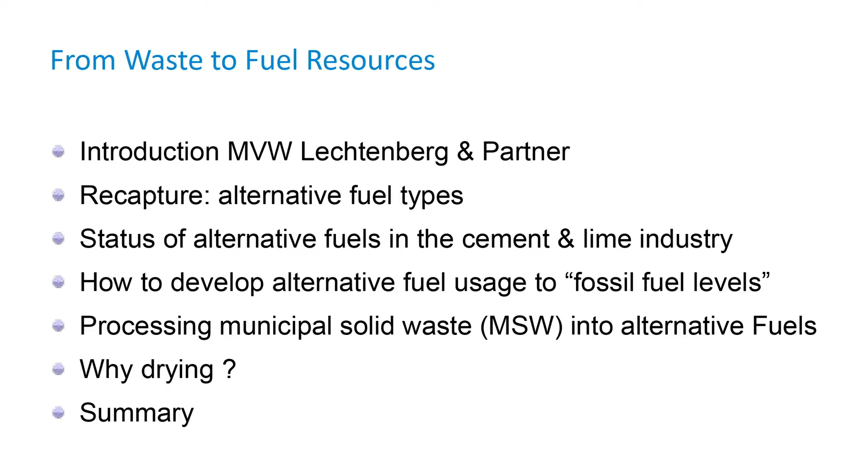I'd like to speak about RDF for municipal solid waste, and especially the opportunities in growth and in technical equipment for the processing of municipal solid waste into RDF. A short introduction about our company, a recap of alternative fuels, what are alternative fuels, how can alternative fuels be processed, the status of alternative fuels in the cement industry worldwide so you can see which growth potential is available with the processing of alternative fuels, and how to develop such projects and process municipal solid waste into RDF.

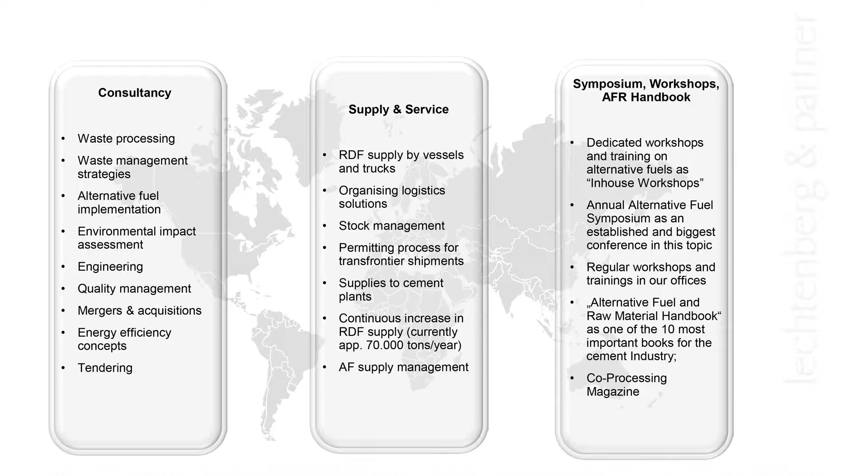First of all, a short introduction about our company, MVW Lechtenberg. We are consultants, advisors for the processing of alternative fuels from municipal solid waste and other waste. We are also the editors of the Alternative Fuels and Raw Materials Handbook in the cement and lime industry. This handbook you will find in every second cement plant in the world. We are doing trainings and workshops together with cement associations all over the world, and we have been developing projects for all cement groups in the world, but also for other industries like coal-fired power plants, lime industries, waste management companies and institutions, governments all over the world.

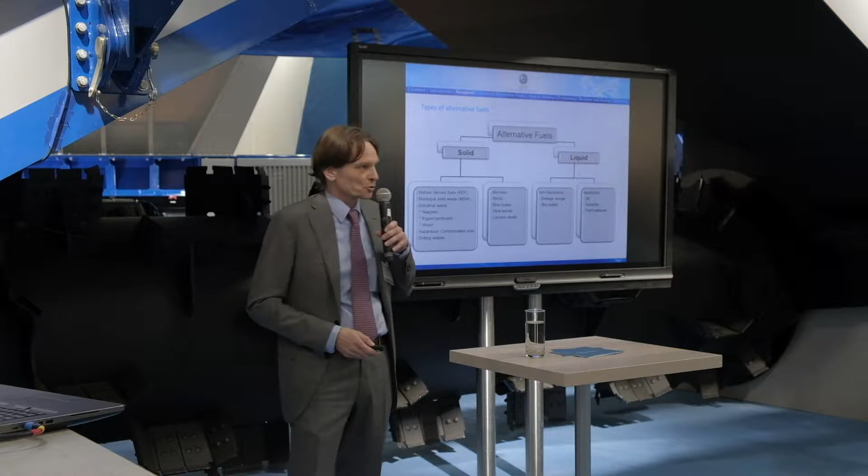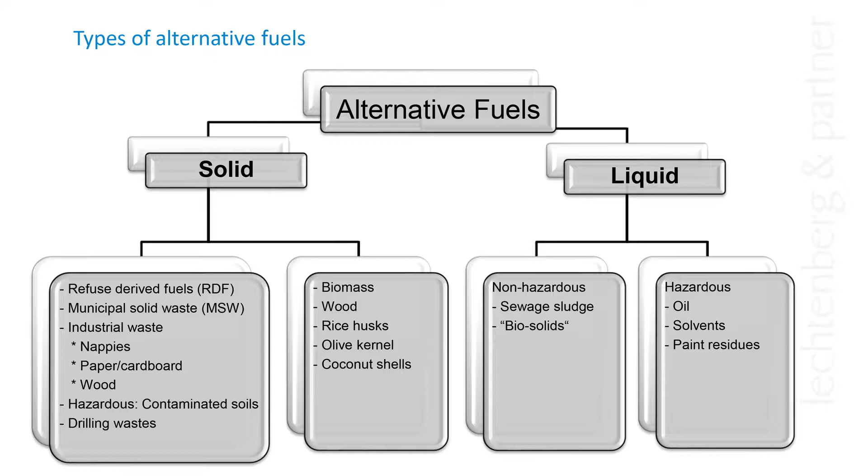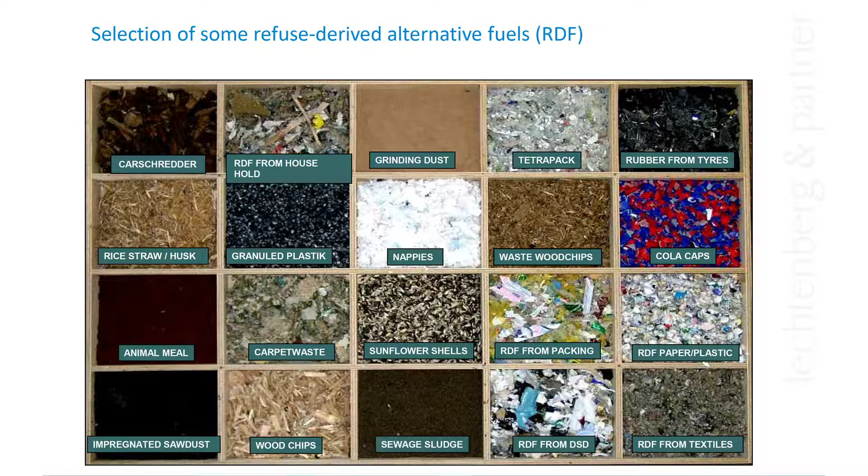What are alternative fuels? First of all, we are dividing alternative fuels into solid and liquid ones. Today we will speak mainly about solid alternative fuels, especially about refuse-derived fuels or biomass-derived fuels, refuse-derived fuels from municipal solid waste or from commercial and industrial wastes. This is a selection of various alternative fuels, both from commercial industrial waste, but you see also RDF from household waste, sewage sludge, waste wood and many others.

Why is the cement industry using alternative fuels? First of all, when you look at the calorific value, you see that the RDF or other biomasses have a quite high calorific value, around 4 to 4,500 kilocalories. Why am I speaking in kilocalories? The cement industry is a very old and conservative industry, so it's always speaking in kilocalories and not in kilojoules. But to convert it into kilojoules, you just need to multiply it by 4.1.

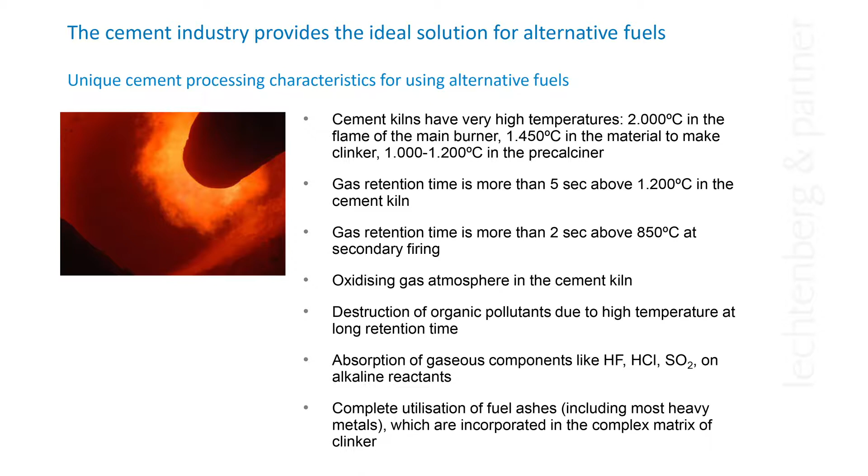The cement industry is using alternative fuels for around 50 years. The process conditions in the cement plant are ideal to process any type of waste in an environmentally friendly and sustainable manner. They have a very high temperature of up to 2000 degrees, and a long retention time above 5 seconds above 1200 degrees. When you look at the hazardous waste incineration plant, the temperature needs to be above 1100 degrees. So the conditions in a cement plant are ideal to process refuse-derived fuels or alternative fuels.

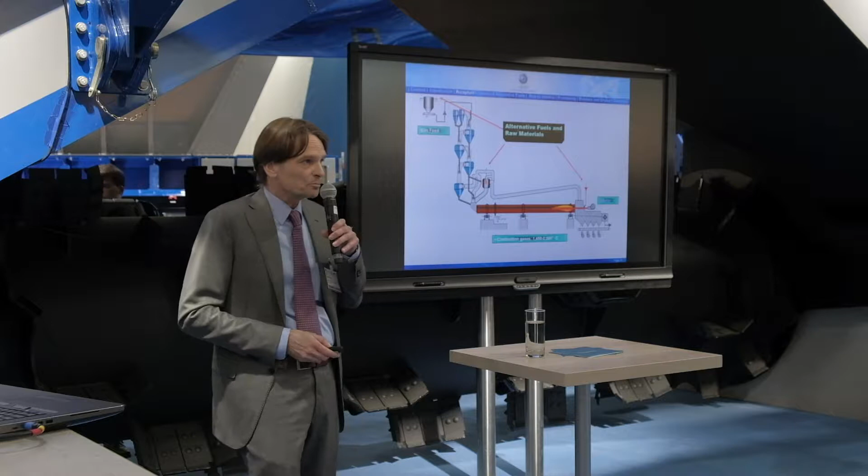There are certain possibilities to feed in alternative fuels in a cement kiln, first of all in the calciner or at the main burner.

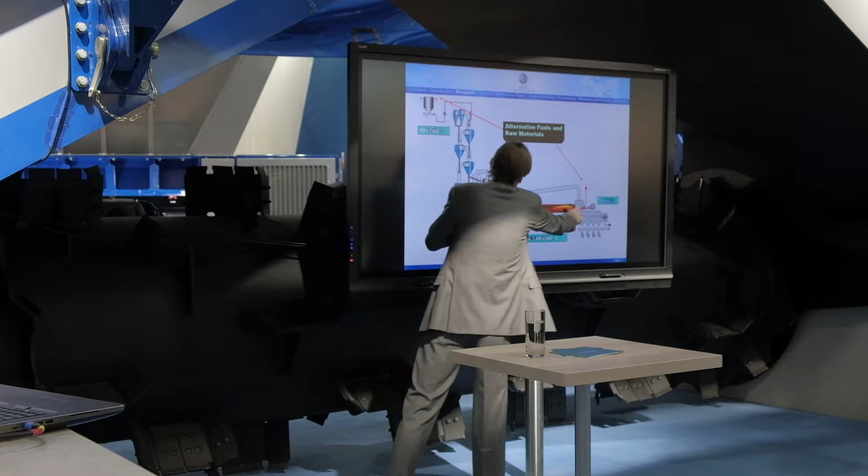Co-processing is recognized as a sustainable waste management solution because it has the highest energy efficiency, even higher than in a waste-to-energy facility. The ashes of the process are combined into the clinker matrix, so you don't have any residues. If you build a waste-to-energy facility and burn municipal solid waste, still around 1/3 of the material remains as slag and ash which you have to dispose of. Not in a cement plant, because the ashes are combined in the clinker matrix. So it's recognized in the recycling hierarchy as recycling.

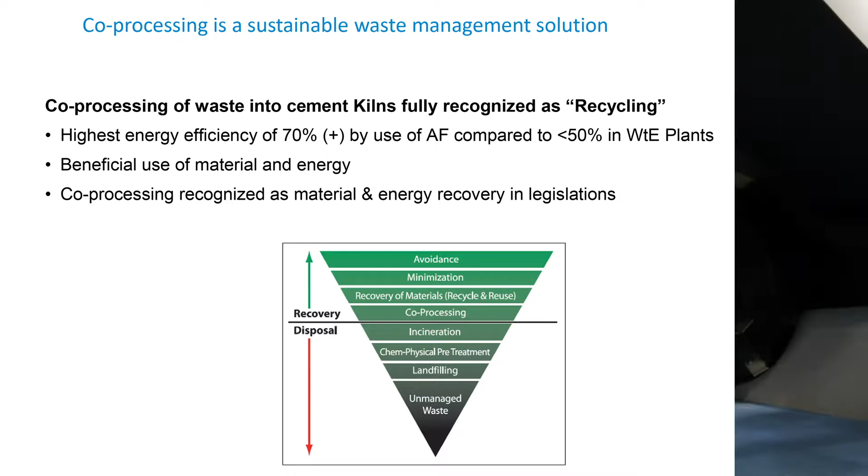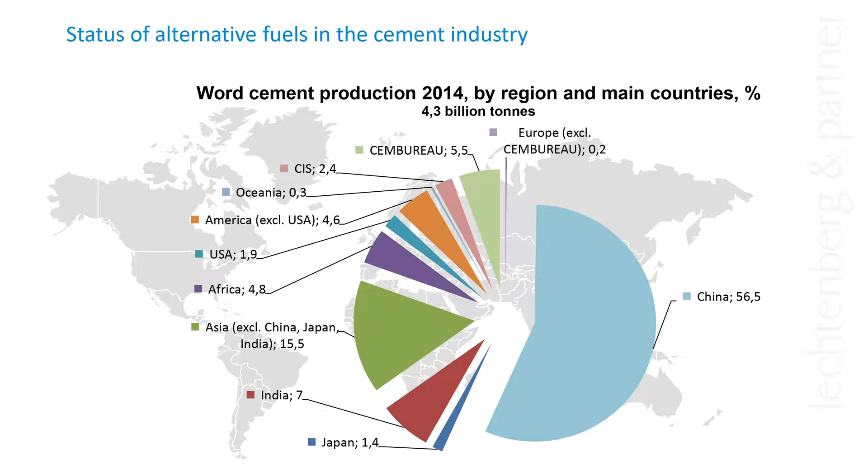Before, when we look at the cement industry, the world cement production in 2014 was around 4.3 billion tons. 56% of the cement production is happening nowadays in China, and the rest in the rest of the world. 4.3 billion tons of cement, and in almost every country in the world you find cement plants.

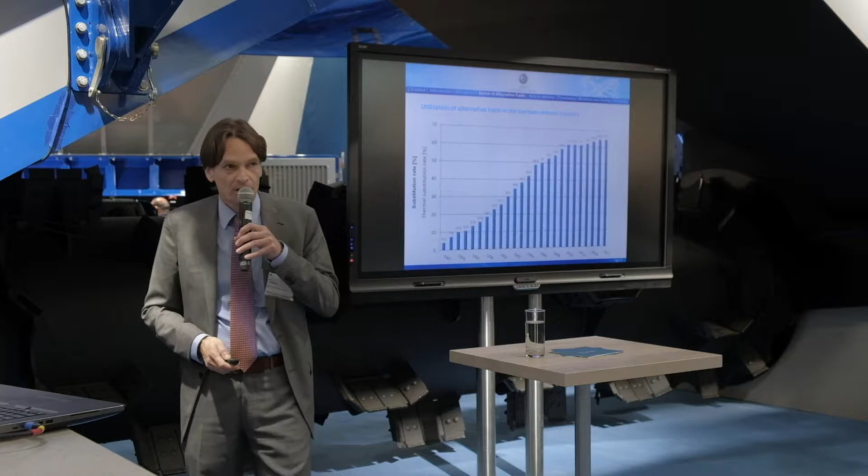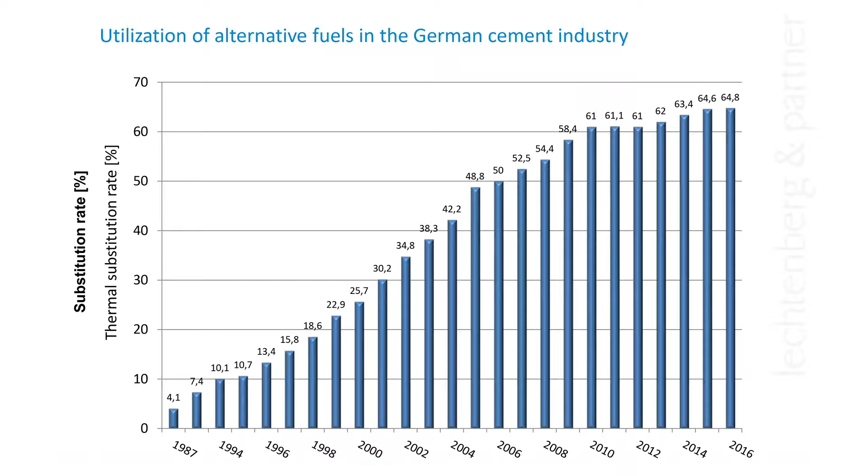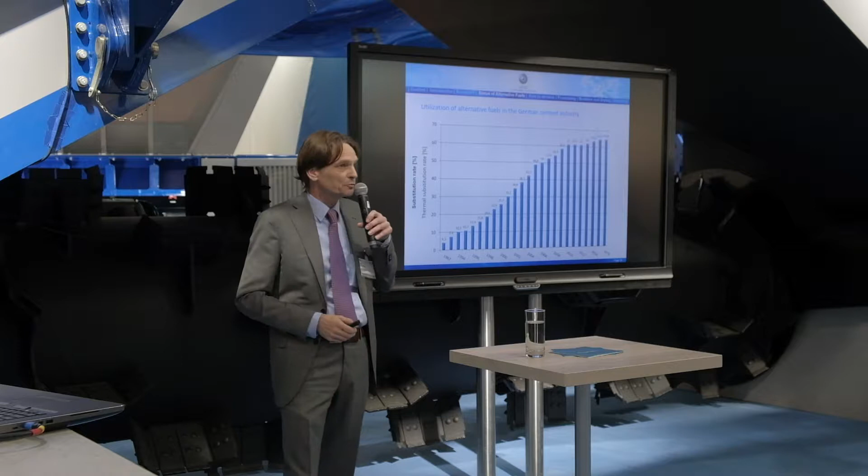Many cement plants in Germany started to use alternative fuels some 30 years ago. So when I started to work in the industry, the substitution rate, the usage of alternative fuels in the cement industry, was just starting. Nowadays, the thermal heat demand in the German cement industry on average is 63 or 64%, provided by alternative fuels.

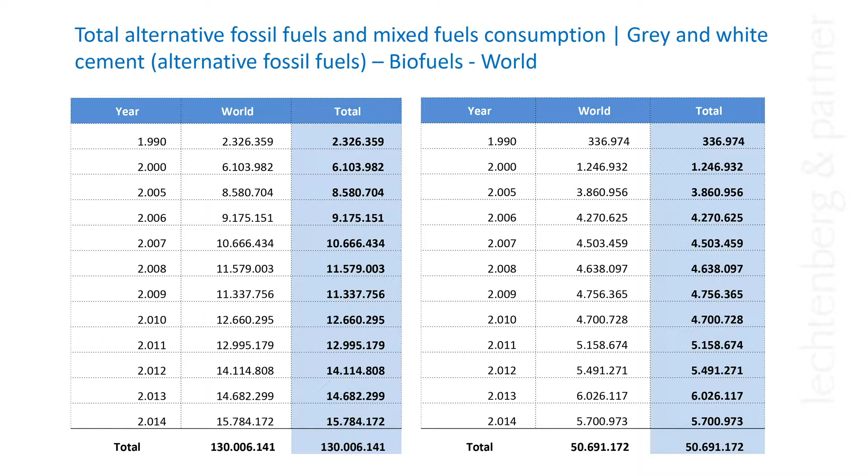The consumption in the worldwide cement industry is around 15 million tons, the current use of alternative fuels in the cement industry. There's a huge potential in the cement industry to use more alternative fuels, and a big appetite to do so, because alternative fuels are cheaper than fossil fuels. This is the main driver. We made some rough calculations.

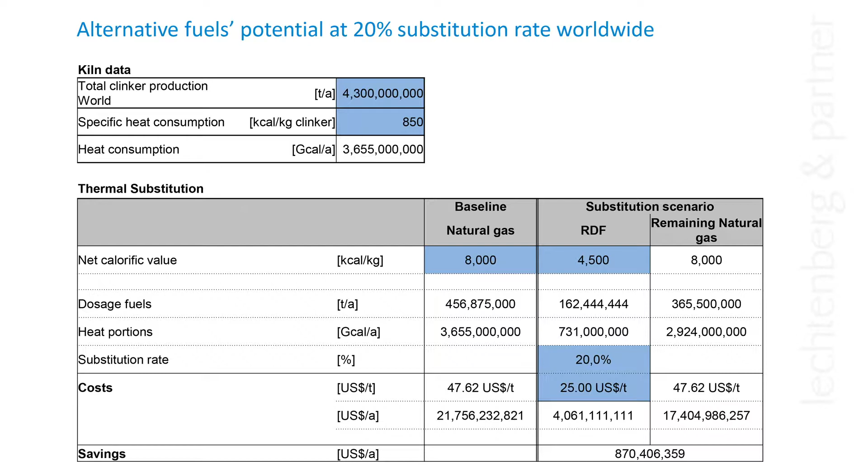If we achieve a 20% substitution rate, the total demand for refuse-derived fuels in the worldwide cement industry will be around 160 million tons. If we increase to 60% substitution rate, which is the current average usage of alternative fuels in Germany, it will end up to around 500 million tons of alternative fuels.

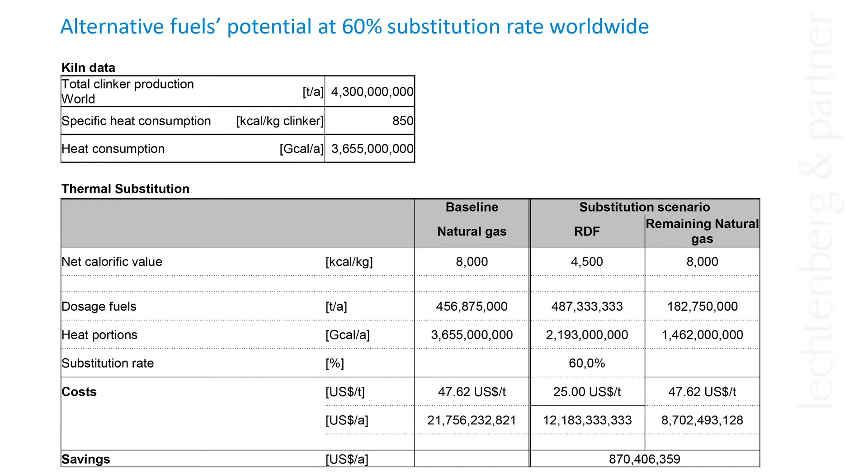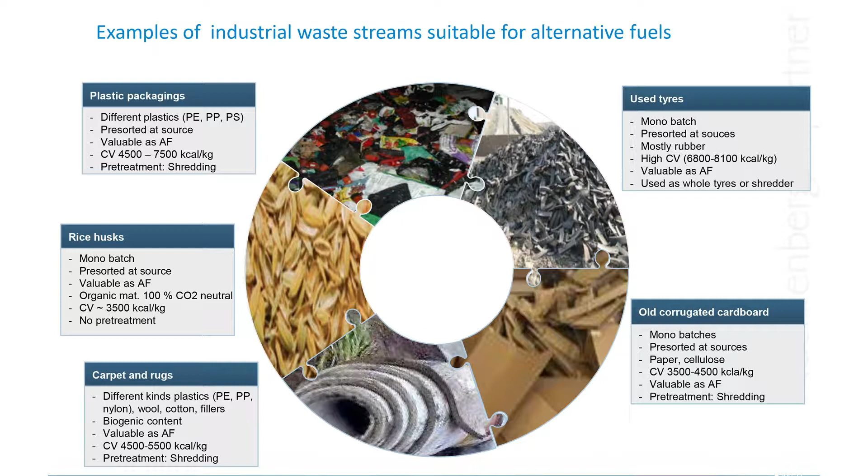500 million tons. I'll give you some examples of waste streams which can be processed into alternative fuels. Used tires are common practice in the cement industry. You have old corrugated cardboard, paper which cannot be recycled, biomass such as rice husk, mixed plastics packaging - a very important theme, especially now in Europe after China has closed the borders.

Carpet and rugs - so many defined industrial streams which can be processed easily into alternative fuels. But let's concentrate on municipal solid waste, where you have a mixture of everything. These are pictures from projects all over the world, in Pakistan, India, Egypt, and many other countries. And the waste is always different. So how can you process this waste into alternative fuels?

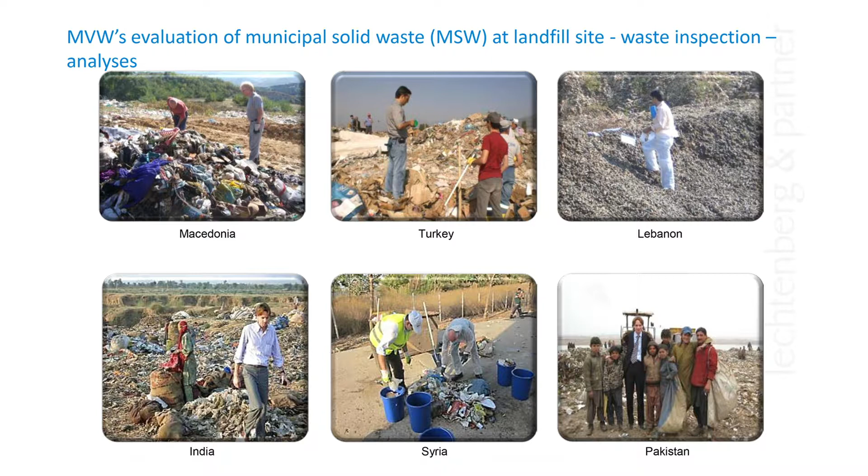First of all, by knowing exactly what you're feeding and what you have, we do waste sorting tests. These are some examples in India, Pakistan, Lebanon, Turkey, Macedonia. The waste is sorted to define what fraction can be processed into alternative fuels and what fraction of organic waste has to be processed into compost, fertilizer, or whatever. So we know exactly the percentage of RDF yield which can be further used.

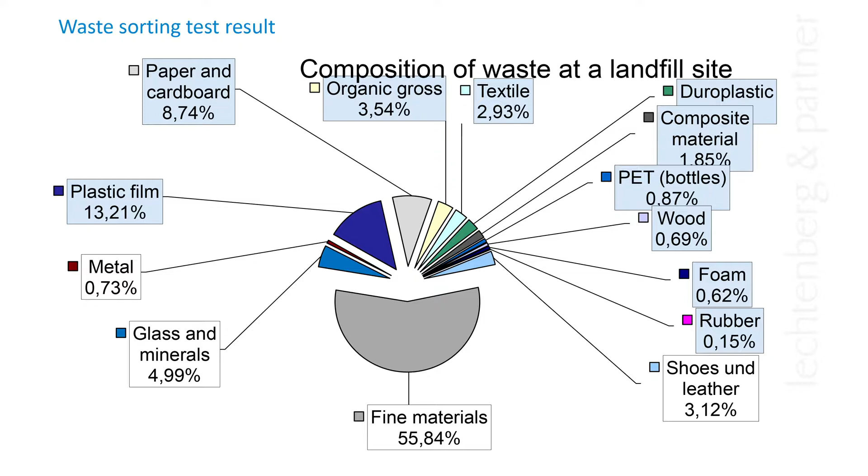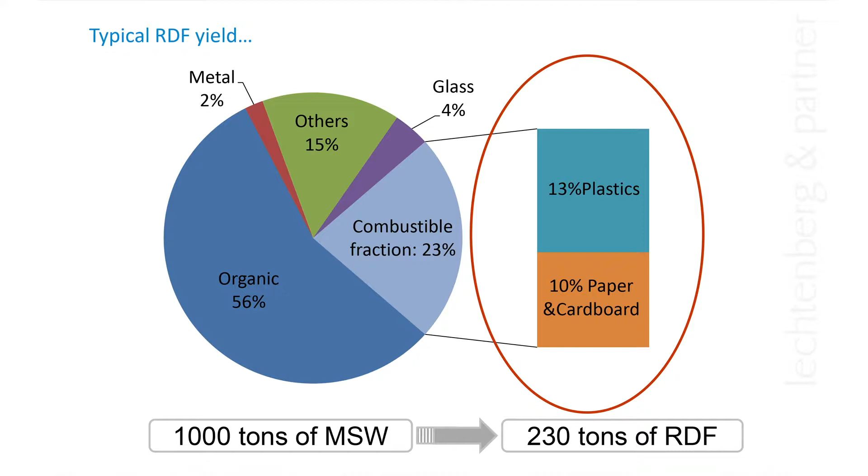In this example, you see the types of waste in this area which can be processed into alternative fuels. This is unfortunately only a fraction of 23%, meaning you have to process 1,000 tons of municipal solid waste to yield 230 tons of RDF. This is not much. Processing can be done easily

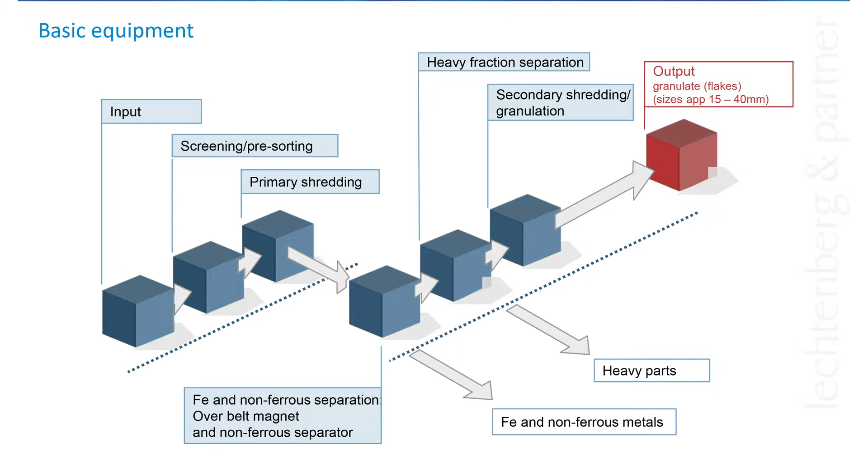if you screen, pre-sort, do primary shredding, heavy fraction separation to separate stones, metals, heavy parts, and then secondary shredding to get a defined grain size.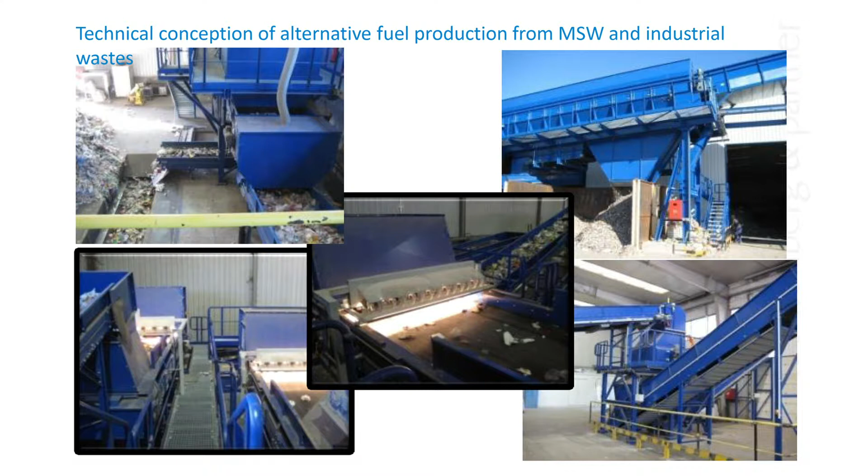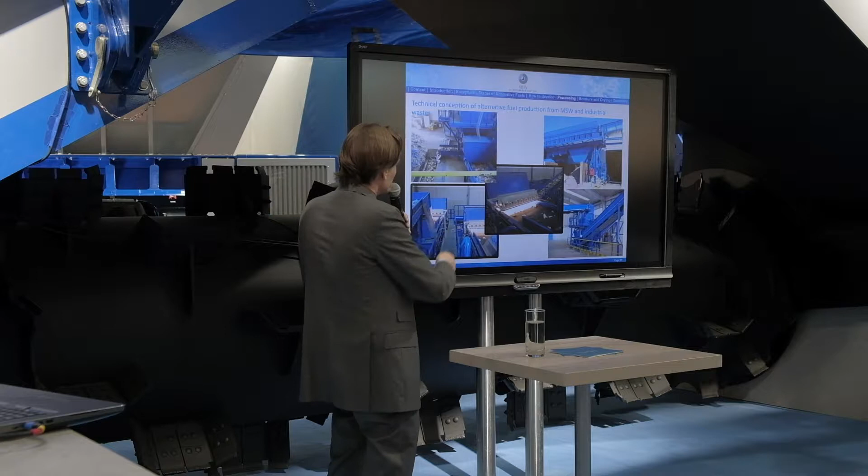But this is a small facility. This facility is in operation in Portugal, a project we completed about 10 years ago, where the company Eggersmann also delivered parts of the equipment, with optical sorting systems, drum screens, and others.

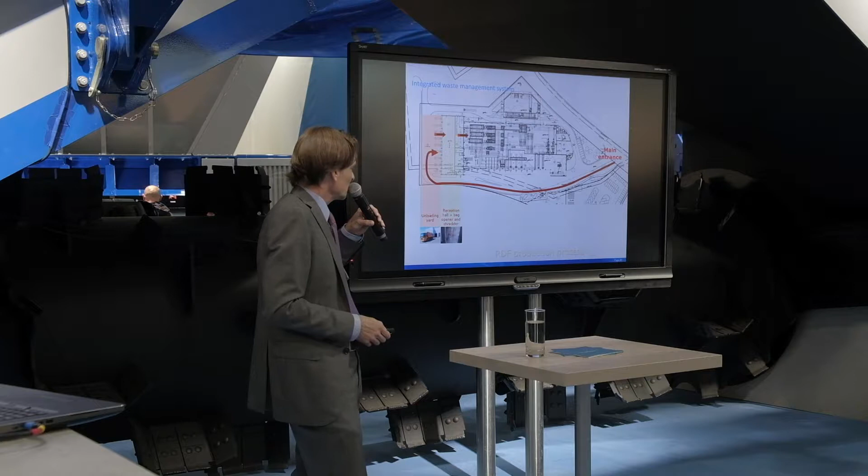But there are also bigger projects for municipalities - a huge facility. The material comes delivered by normal trucks and is unloaded in the reception hall. Then the material is transported by a fully automated crane to drum screens, light and heavy fraction separation, optical sorting systems to take out PVC and recyclables, then hand picking to separate clean organics for compost and fertilizer, again ferrous metal separation, and at the end a fraction which is processed into RDF. I'd like to show you a small video.

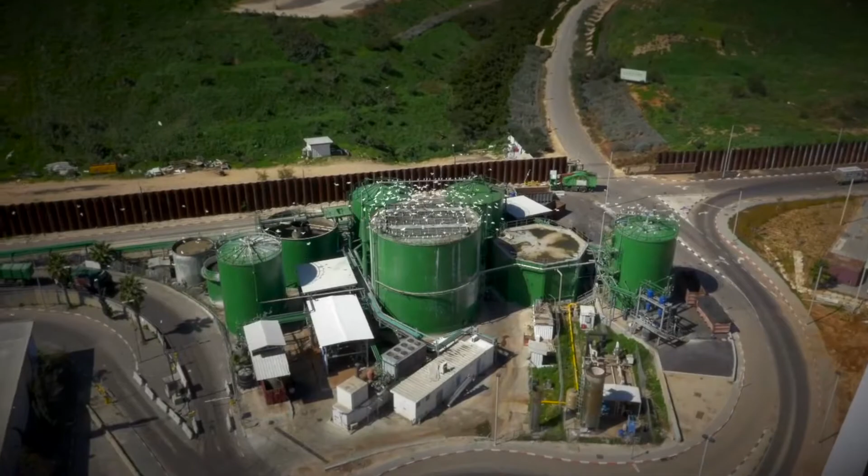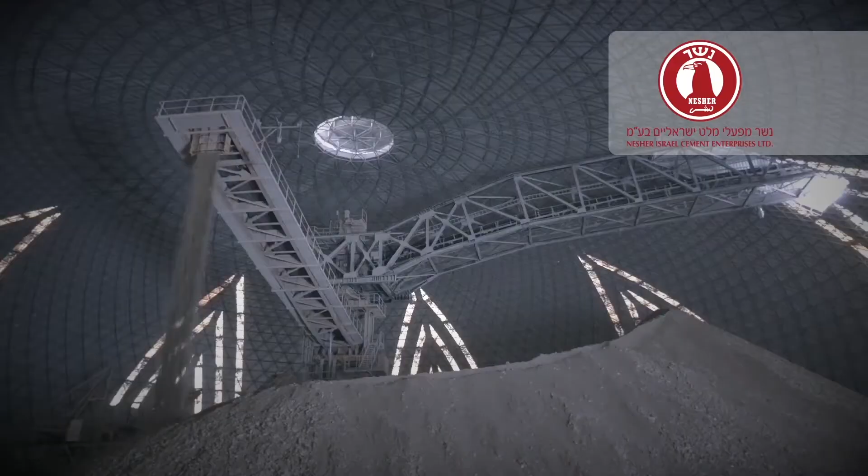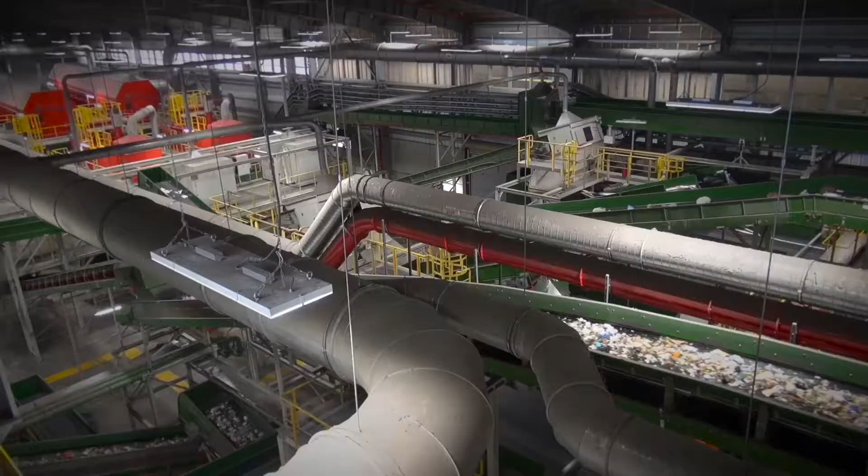Israel is constantly growing, and the Tel Aviv area is a hub of business, tourism, and vibrant modern progress. But modern life and higher living standards have a price: increasing amounts of waste, 3,000 tons of it daily in the Tel Aviv area alone. The Dan Municipal Sanitation Association operates the Hiriya Recycling Park and strives to provide a national role model for developing and adopting effective technologies for dealing with municipal solid waste, turning it into a resource and reducing the amount sent to landfills. For over a decade, against all odds, the association has promoted the RDF project as the best possible way to treat the waste of the Tel Aviv metropolitan area. In a cooperative effort with Nesher, Israel's leading cement manufacturer, and the Veridis Group, pioneer in ecology and infrastructure in Israel, the RDF plant was built - a state-of-the-art facility that sorts mixed municipal waste and produces waste-based RDF fuel, as well as various recyclable products.

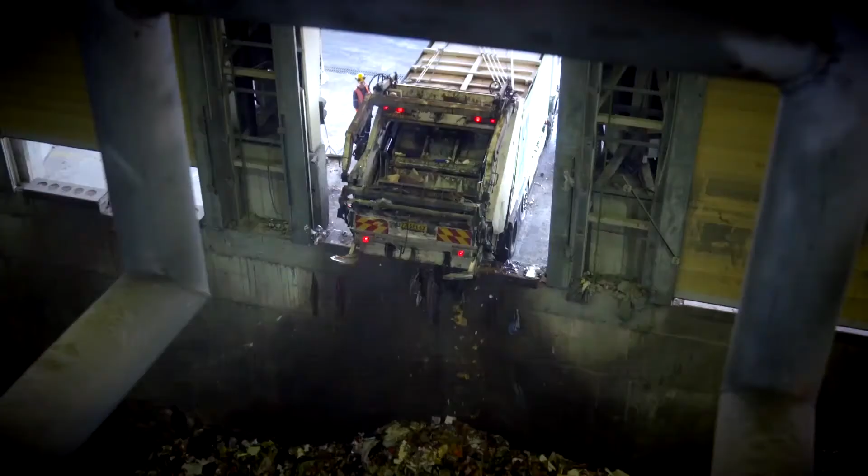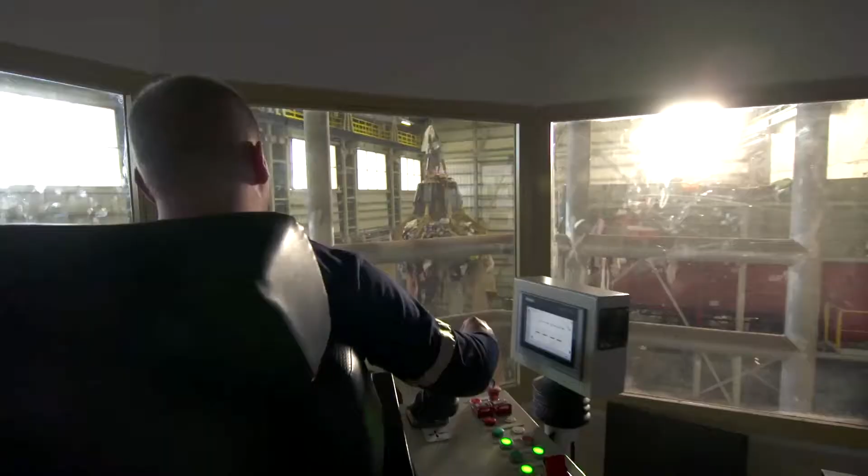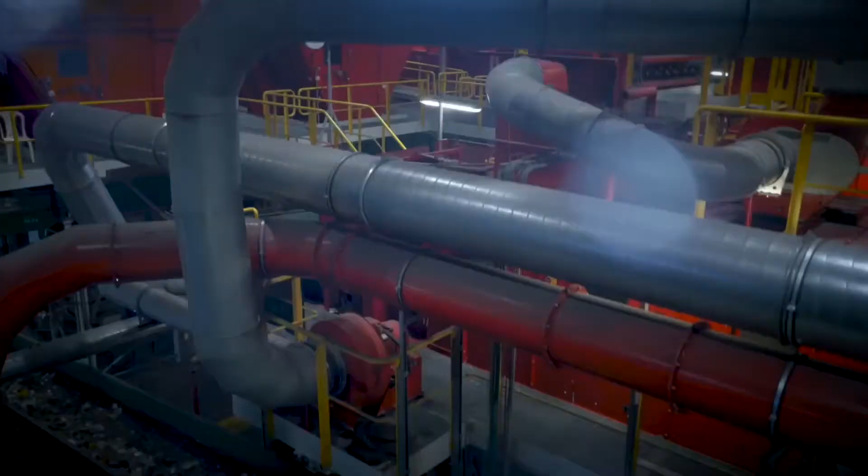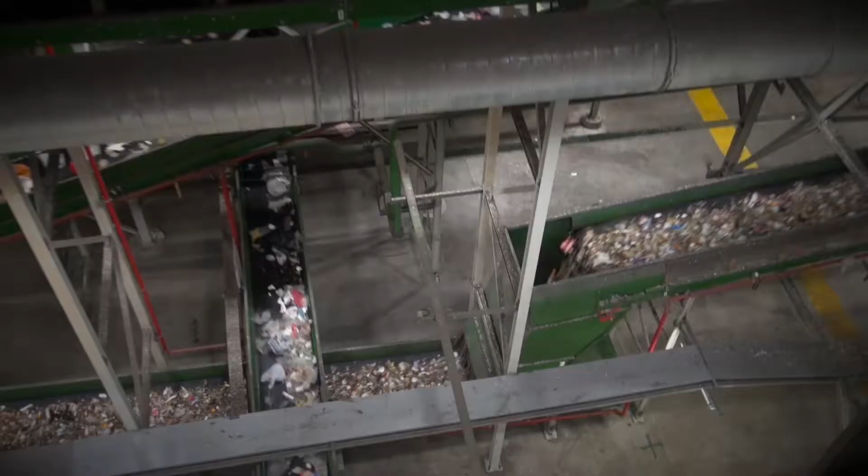RDF, turning waste into energy. Hundreds of garbage trucks from 25 towns in the Tel Aviv area dump municipal solid waste at the Hiriya site each day. The RDF plant is expected to take in over 1,500 tons of garbage daily, about half the waste produced in the Tel Aviv area. Household, industrial, and commercial waste is loaded into shredders and bag openers. From there, it's conveyed to sorting lines. The waste is sorted without human intervention, according to size by trommel screens. At this point, organic matter is separated out and sent to a facility which turns it into agricultural fertilizer. Blowers separate different types of waste according to their specific weight. Metals containing iron are sorted by a powerful magnet. Aluminum products are sorted using a weaker magnetic field.

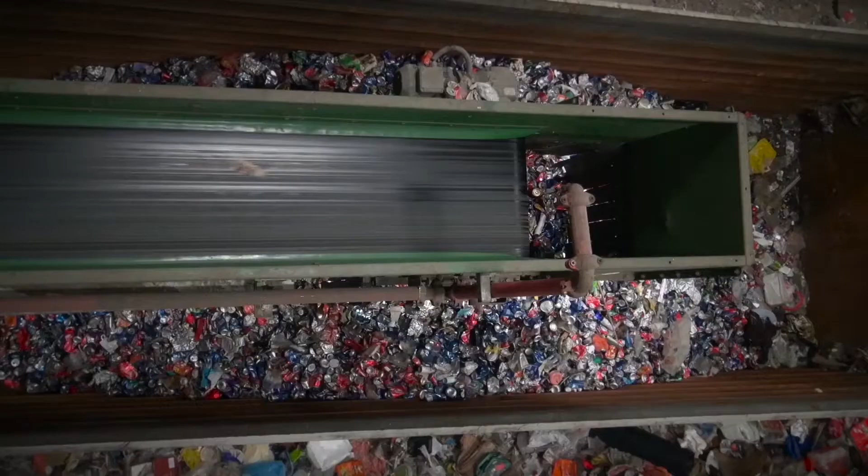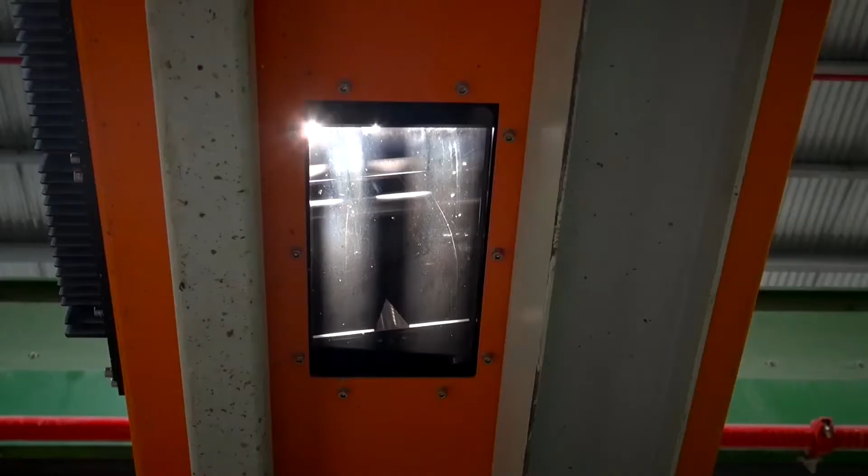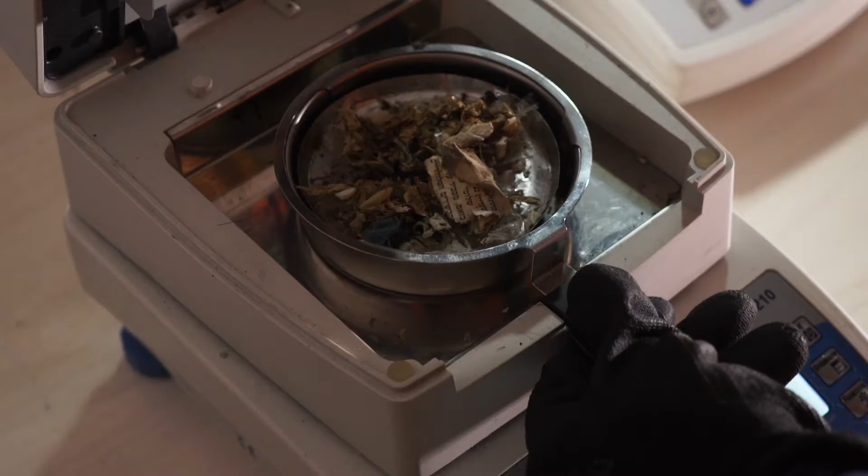Optic sorting identifies substances using infrared rays. All processes in the plant are fully supervised. The quality of the RDF is constantly measured and tested. The dry waste residue with high caloric value is used as an energy source. This fuel substitute is called RDF, refuse-derived fuel.

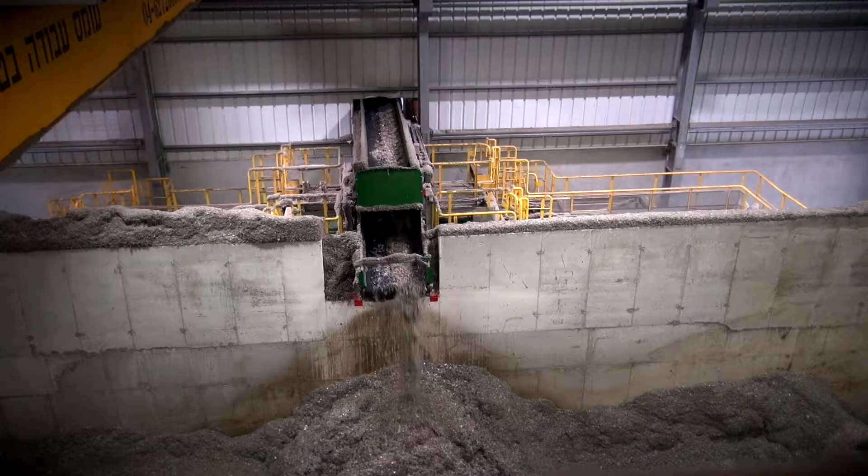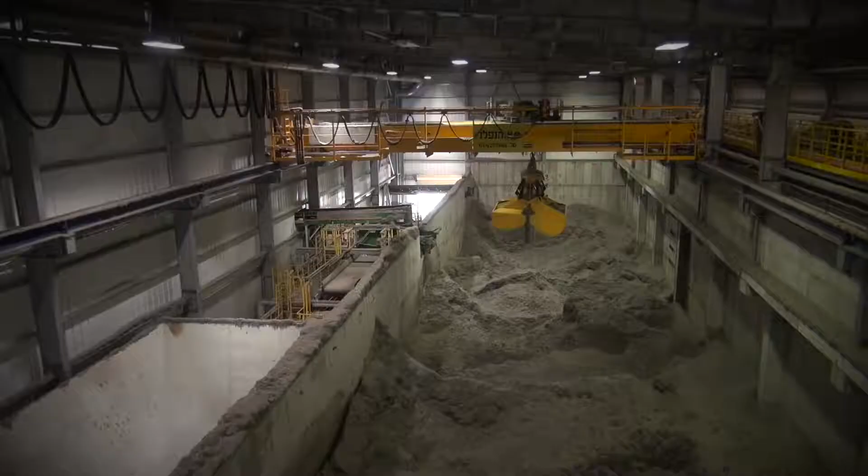During the manufacturing process, the refuse is conveyed to shredders and shredded into even 15 to 25 centimeter particles, which are conveyed to the RDF storerooms. The plant is expected to produce about 500 tons of RDF fuel substitute a day.

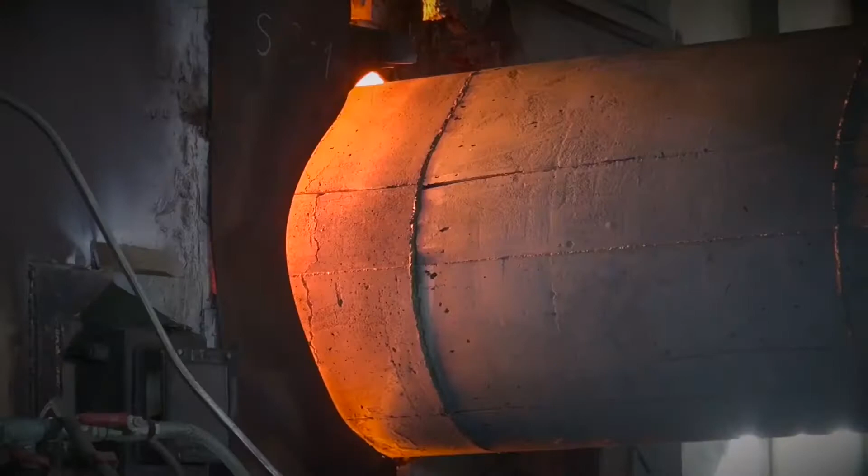Waste that used to be sent to landfills is now sent to the Nesher plant in Ramla, where it's used as a substitute for petroleum-based fossil fuels. RDF is used as combustible material for the cement kilns, replacing about 20% of the petroleum-based fuel consumed at the plant. RDF is recognized worldwide as an environmentally friendly fuel substitute. Using RDF reduces greenhouse gas emissions compared to petroleum-based fuels.

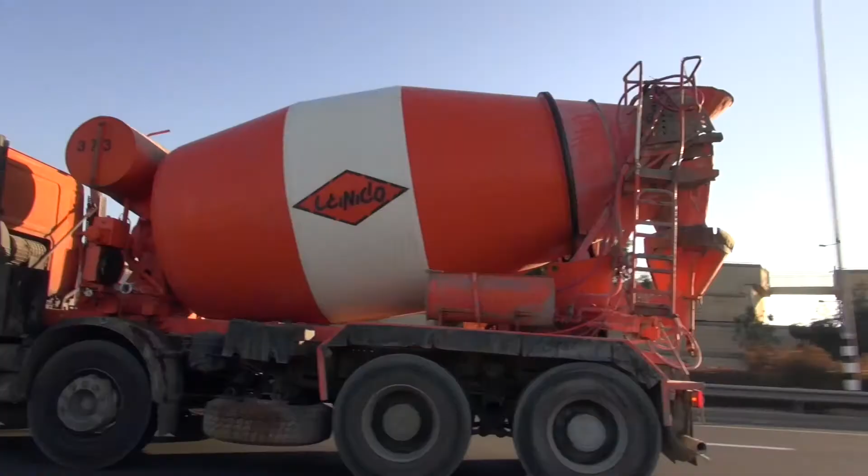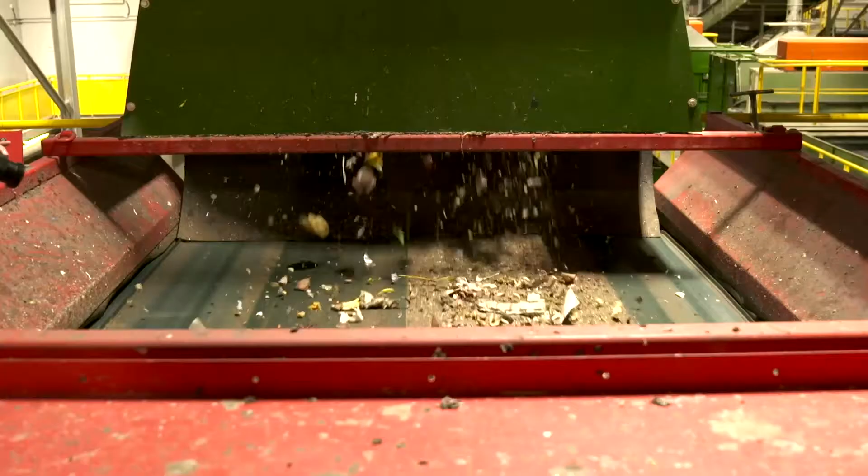So next time you see a new building, neighborhood, bridge, or interchange being built in Israel, remember that our waste is a partner in Israel's growth and development. The RDF plant is an Israeli pioneer in recycling and turning waste into energy.

When resources and technologies are combined with public willingness to change consumption and recycling habits, it's no wonder that this joint effort to ensure a clean, sustainable future bears fruit. Hiriya Recycling Park, the Dan Municipal Sanitation Association.

RDF waste contains moisture, so you have more heat losses due to the evaporation. You also need more air in the cement plant. This is too complicated, and you have to compensate it by additional petcoke or fossil fuels. And you have an increase in the consumption of energy for the clinker production.

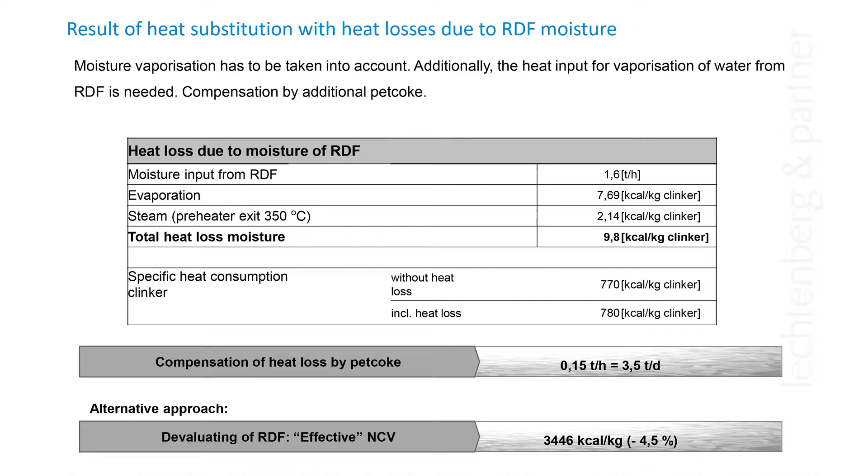So it's of utmost importance to dry municipal solid waste before you process it into RDF. Typical drying processes is the biological drying process. With the biological treatment, you have a maximum discharge of water out of the input material in a very short time.

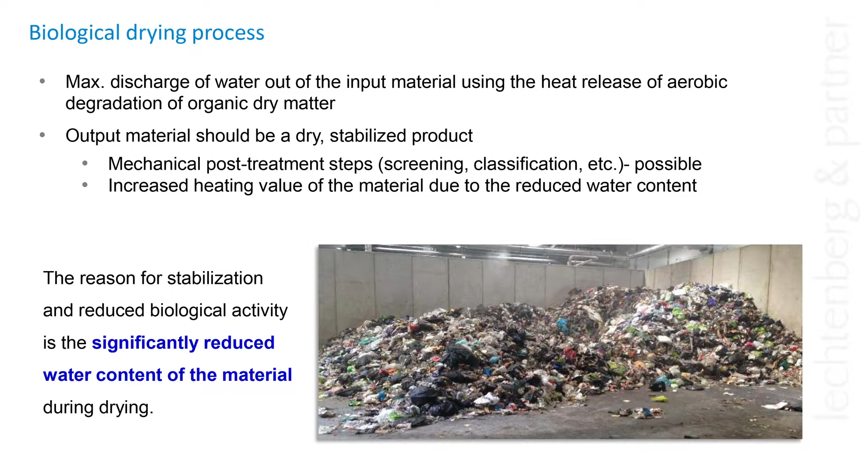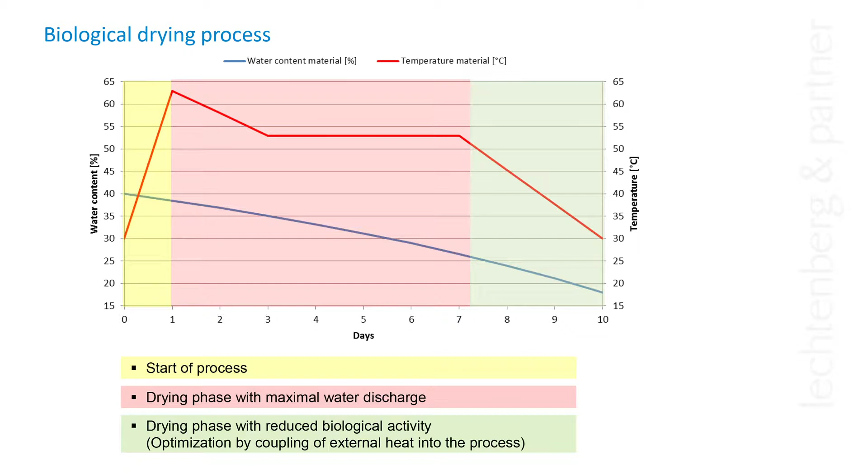The dried material is easier to separate, so you can increase your capacity, and you have a significant reduced water content in the RDF. In the biological treatment and drying process, the material is treated within a certain period of 9 to 10 days.

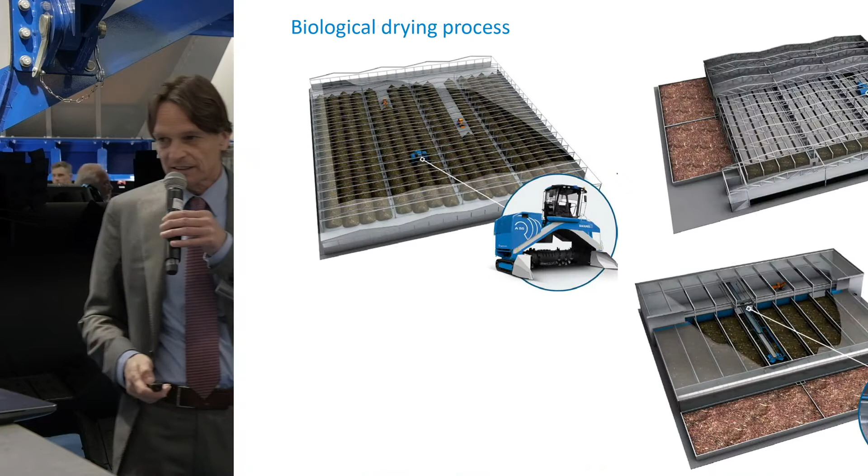With the aerobic process, the temperature increases, and you see the temperature is stable for a certain time and the water is evaporated. With such a process, it's possible to reduce the moisture content from, let's say, 40% to 15–20% within 1 week. What does it mean? Drying. There's several technologies also offered by the company Eggersmann, which you have seen here for the biological drying.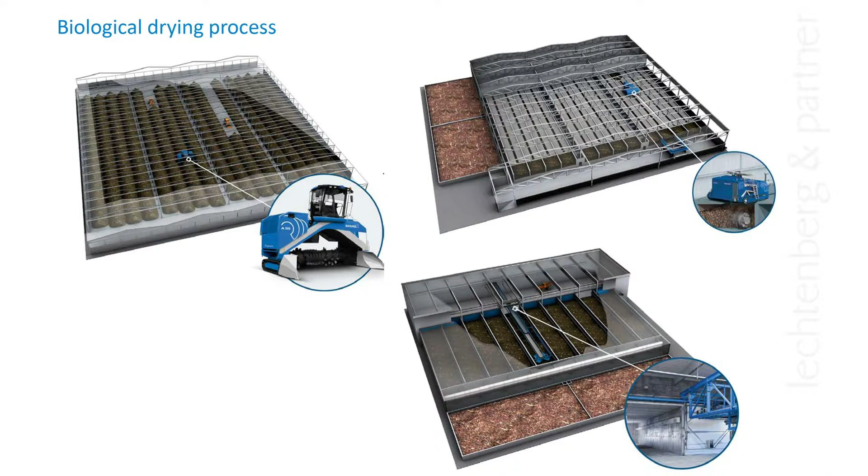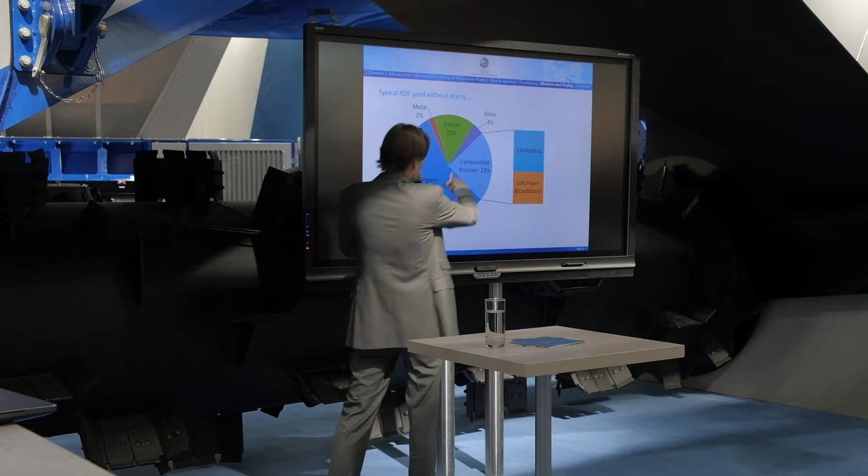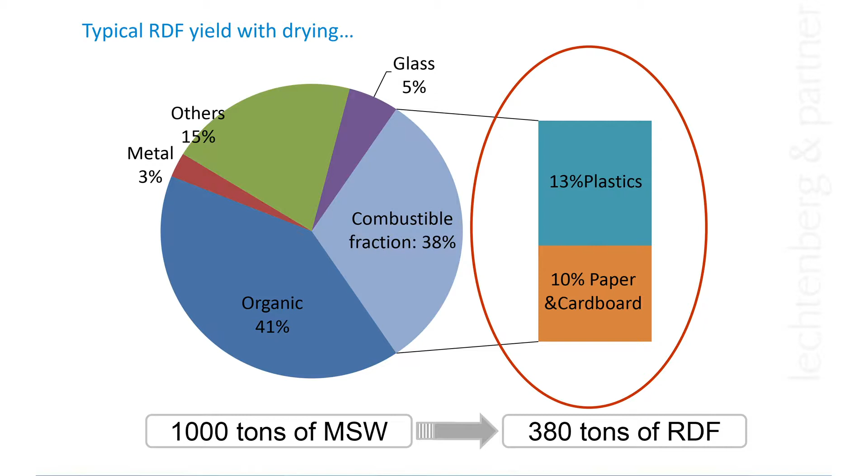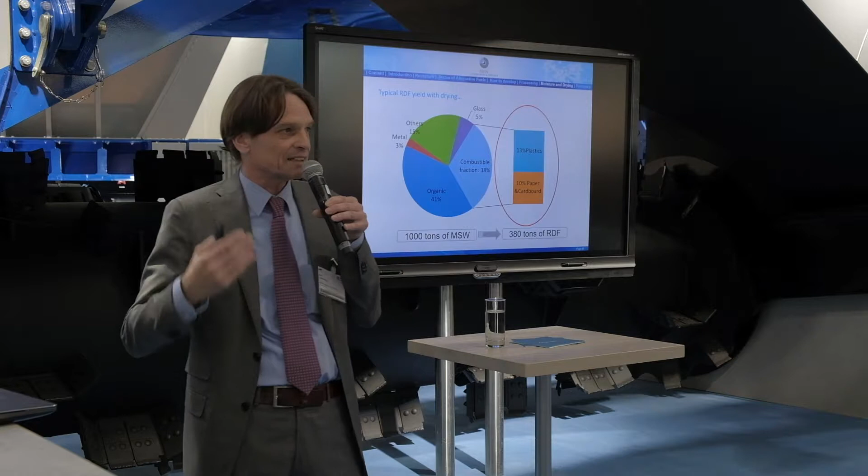If you dry the municipal solid waste before the production of RDF, we're coming back to the picture which I have shown you. In the normal process, you have to treat 1,000 tons to get 230 tons of RDF. If we dry the fraction, we can increase this from 230 tons to 380 tons. That means your process has a higher yield, a higher recycling rate, extraction, and more output of RDF which you can sell to the cement industry.

So in summary, coming to the end, alternative fuels will become a regular fuel. As already started in Western Europe and in Germany and in many other countries, I'm sure that within the next 10 years' time, almost all cement plants in the world will use alternative fuels. So they will need municipal solid waste and companies which are processing municipal solid waste into RDF.

At 20% substitution rate, this amount will be around 165 million tons of RDF. With 60% substitution, which is easily achievable in the big kilns in many countries, this will be a quantity of 500 million tons per year. With modern drying technologies, you can increase the RDF yield, which offers a sustainable waste management solution for waste management companies and municipalities.

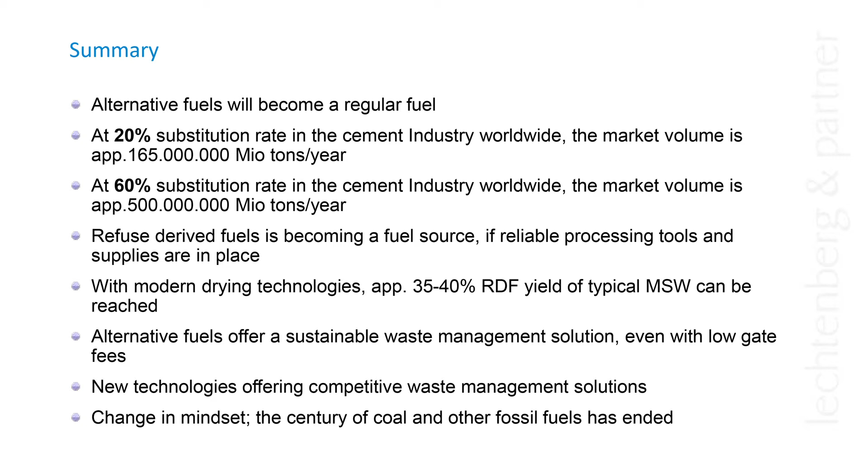With new technologies, you have sustainable and competitive processing capacities, which also will give a change in mindset, because everybody knows that the century of coal has gone and we are now in the starting century of alternative fuels.